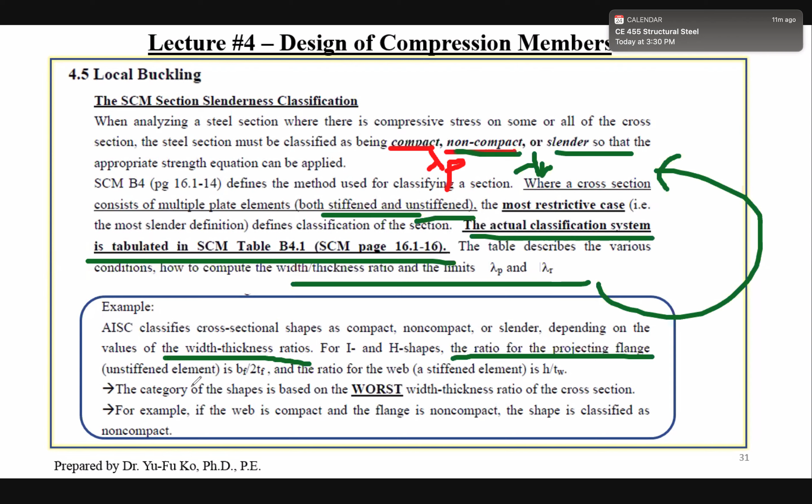So for I or H shape, the ratio of the projecting flange elements, which is unstiffened element, is BF divided by 2TF. BF is the width of the flange, TF is the thickness of the flange. And the ratio for the web element, which is stiffened element, is the height of the web divided by the thickness of the web.

So the category of the shape is based on the worst unstiffened and stiffened element in this shape to define the cross sections. The worst width over thickness ratio to define the cross section is compact, non-compact, or slender. So for example, the web is compact, but the flange is non-compact. So overall the shape will be classified as non-compact. We pick the worst scenario.

Okay, so I think I should reorder like this. The worst scenario is slender, then is compact... oh yeah, then is non-compact. Best is compact. So that would be the order.

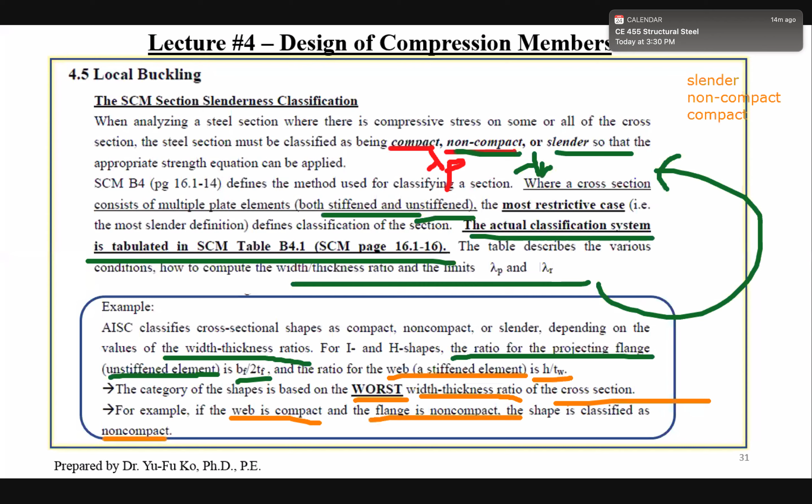Now, for local buckling, the slenderness will be based on the width over thickness ratio of the slender plate element that make up the cross sections of the most steel member. So like I mentioned, for local buckling, it's classified by compact, non-compact, and slender.

So the separation point will be lambda P and lambda R. But for column, the main thing we need to focus on is this separation point, slender or non-compact. All we care about is whether the plate elements that make up the cross sections is slender or not. We really do not care.

Whether that is compact or non-compact. So for column, again, we only care about if the plate elements that make up the section is slender or not. Okay, so that's the main concern for compression member.

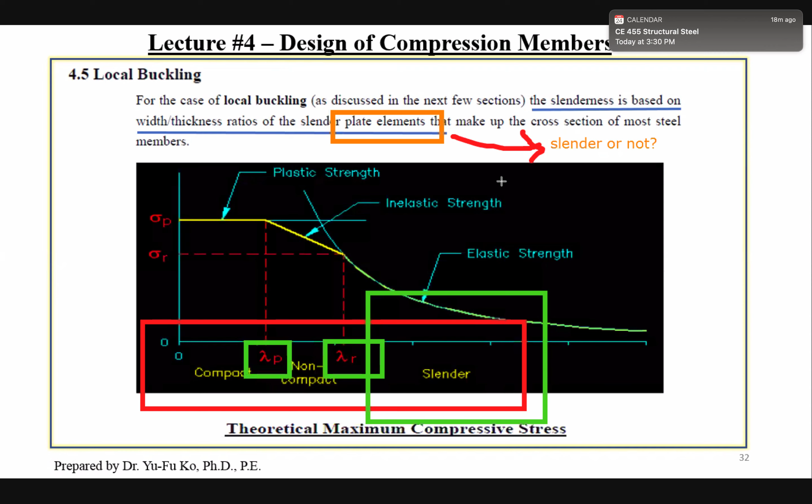All right. So first of all, we need to define what is unstiffened and what is stiffened element. So let me see, let's go to this.

This figure 7 is in your textbook as well. This shows you the stiffened and unstiffened elements of various cross-section shapes for compression member and the limits for lambda R, which is from table, construction manual table B4.

So let's look at the W shape, for example. So for W shape, this is what we call unstiffened elements, and for the web, we call this stiffened element. So how to differentiate this as stiffened or unstiffened?

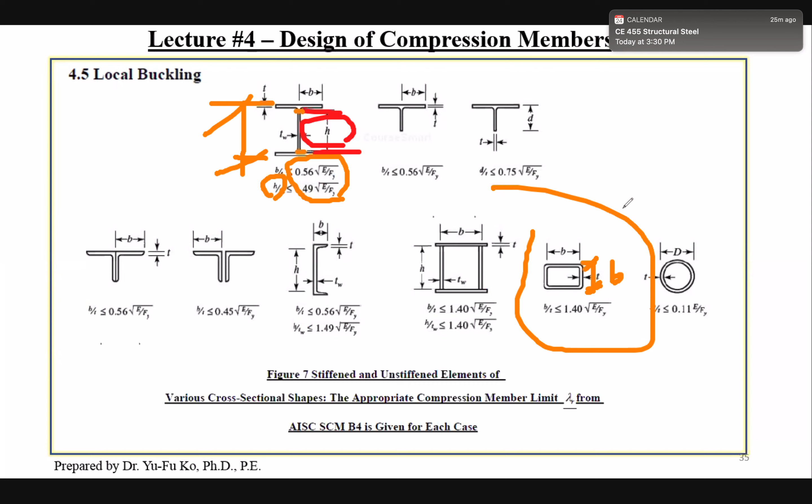We'll go over one example about this so you have a better idea about how to apply this equation to classify the cross section. We'll go over one example. Any questions? No, sir.

All right, so let's continue where we left off. The first 8 cases listed in the manual, table B4.1, refer to unstiffened elements. The remainder cases refer to stiffened elements. The table includes figures to illustrate the definition of different components.

What the table does not include is a graphical representation of the stress distribution that applies to each case. The applicable stress state is included in the element descriptions. Note that the cases for unstiffened elements do not include the effects of combined compression and bending. The equation conservatively assumes uniform compression due to either flexural or compression elements.

For the stiffened element cases, the combination of flexural and compression is considered separately from the cases of pure compression and pure bending for W-shape or I-shape members. So this only affects the limit for lambda P, not for lambda R.

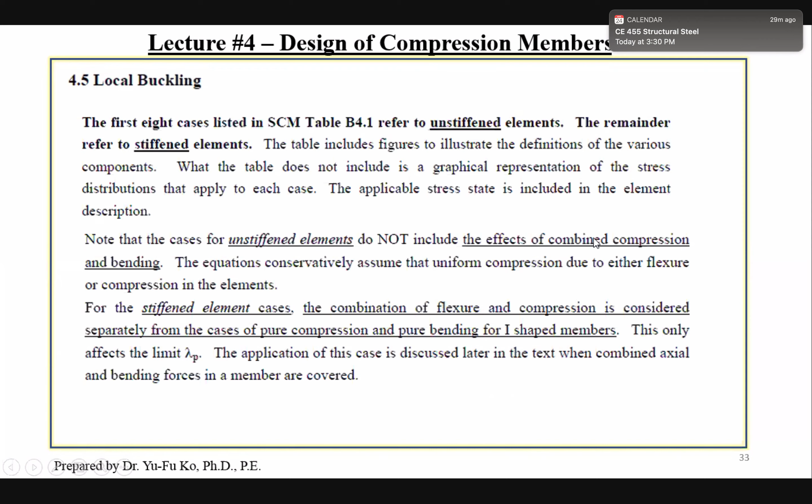But anyway, this is only for your information. You don't need to pay too much attention or worry about these notes, just for your information. What you really need to know is where to find the table in the manual to find the limits for lambda r for stiffened and unstiffened elements.

So for I or W and H shapes, the projecting flange, like I just mentioned to you, is considered an unstiffened element, and it can be taken as BF over 2 divided by TF, which is BF over 2TF. BF and TF are the width and thickness of the flange. The upper limit for lambda r, slender elements, is 0.56 square root of E over Fy, like I just mentioned to you in the previous slides.

As for the web, for W and H shapes, it will be a stiffened element, and the width is the distance between the roots of the flange. So it's classified as H over TW. So like I said, H is the distance between the roots of the flange. TW is the thickness of the web. The upper limit for slender elements, lambda r, is 1.49 square root of E over Fy.

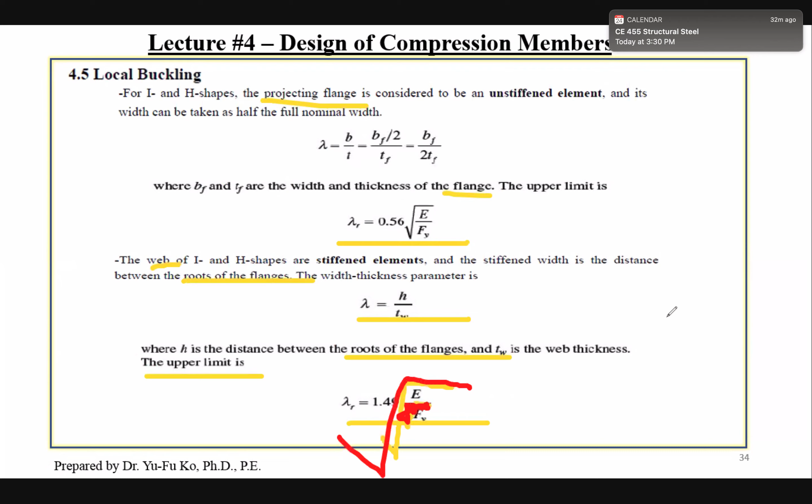So this is what we just talked about for W or H or I shape. This is the graphical representation about local buckling. As you can see, there's a wrinkle happening. This is what we call local buckling on the flange. So the slenderness of the elements - compact, non-compact, slender - will be shown like this representation.

And one more note for your information. If you go to Part 1 of the manual, for example, I just threw out a section - W16 by 31, for example - you will see a footnote C right next to the notation W16 by 31 in the manual Part 1. And if you read the footnote, they will tell you that these sections...

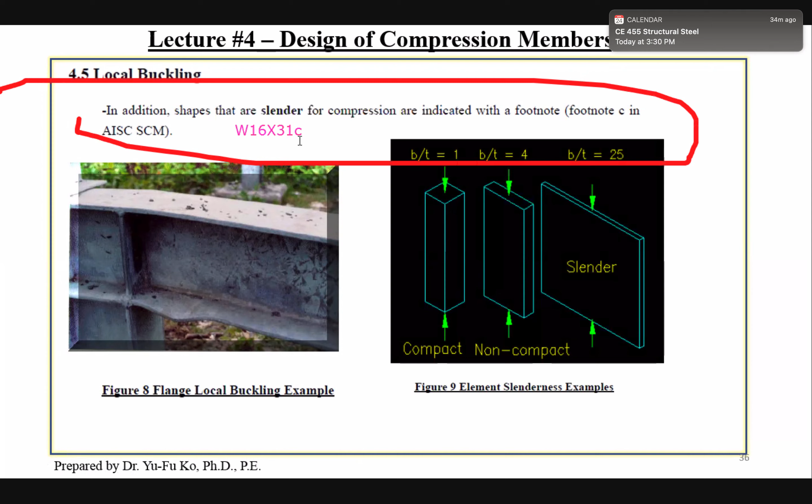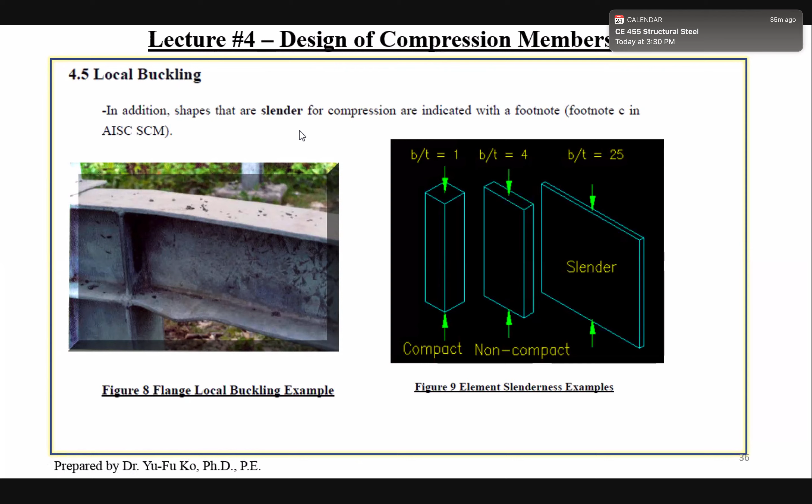Let me see, this section - this section is slender for compression. So if you see a footnote C next to the designation of the shape, which means this shape is a slender cross section for compression. So if you guys have the manual with you, you can go ahead and check. Go to Part 1 of the manual. If you see a footnote C next to the shape designation, you will see the description: this section is slender for compression. So which means the manual already checked and classified the slenderness of the shape for you.

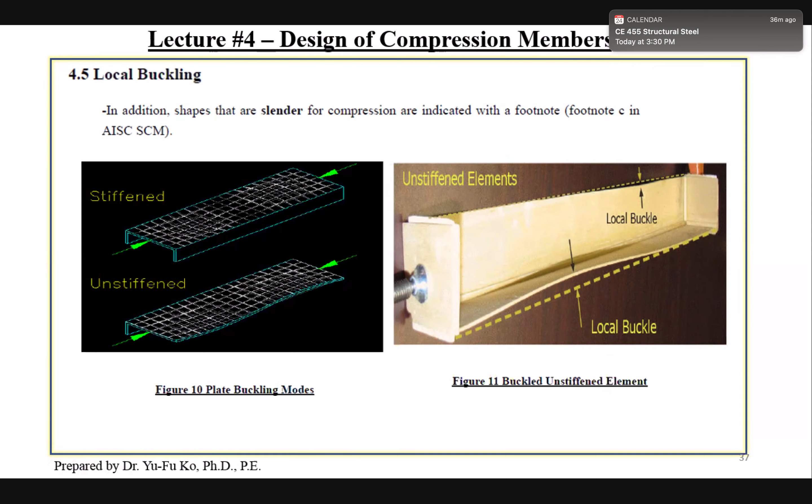Now, those are more graphical representations about the local buckling for stiffened and unstiffened elements in reality. So like I said, buckling stability alone is a one-course subject in graduate school in the future. If you guys are interested in this theoretical analysis, you can take the course Stability and Buckling in graduate school in the future. But this is all where it comes from, all of this local buckling. So now, like I said, on stiffened and unstiffened elements, where I highlighted here - this is for unstiffened, and this is for stiffened. So these are exactly the same as you see in your textbook. I just drew it with different colors for you to differentiate. This is unstiffened, this is stiffened elements.

So let's show one example. Example 4.2. I think example 4.2 we covered last week - W14 by 74 column. That's what we did the calculation for the global buckling strength last week, I think it's on Monday. But now, example 4.3, let's examine and investigate if this column has local stability issue, local buckling.

So what we can do is go to Part 1 of the manual, then you can read the flange width 10.1, the flange thickness is 0.785 inches. So for the width and thickness ratio for the unstiffened elements, which is this guy, in the W sections, is 6.43. The lambda limit for unstiffened elements is 0.56 square root of E over Fy, which is 13.5. This number is bigger than 6.43, so this is okay. So meaning the unstiffened elements is non-slender.

Likewise, let's check for the web. This one, stiffened elements. The ratio is H over TW, and is equal to D minus 2 KDES. So what does it mean? What it means is the W sections - if you zoom in, the W sections actually have a kink or transition between the web and the flange. So you see these transitions. So this distance in Part 1 of the manual we call KDES. So there are two, on top and bottom. So your H is actually D minus 2 KDES. It's the design value of K, based on manufacturer. So in the manual, they give you the smallest value as a design value.

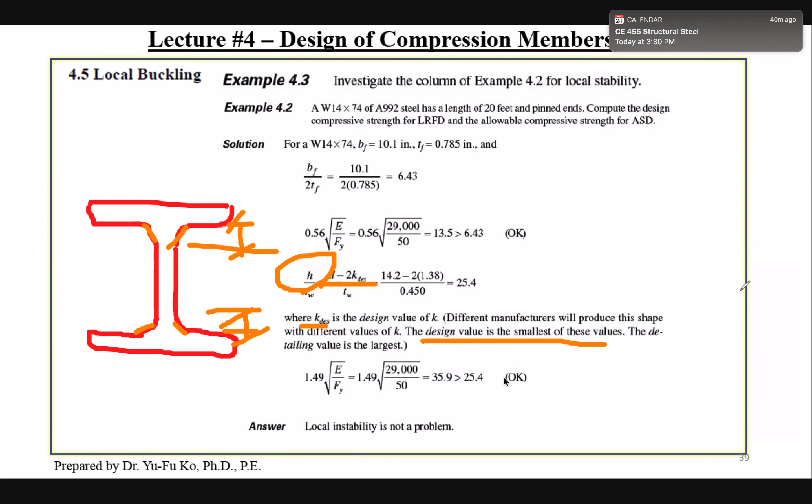So your H is D minus 2K, this number is coming from the manual as well on part 1. If you go to W14 by 74.

So with that ratio, you got 25.4. The lambda R for the web is 35.9. It's bigger than 25.4.

So this means your flange is non-slender, and this means your web is non-slender. So because both of these are non-slender, the conclusion is your cross section of W14 by 74 is non-slender sections. So local buckling is not a problem.

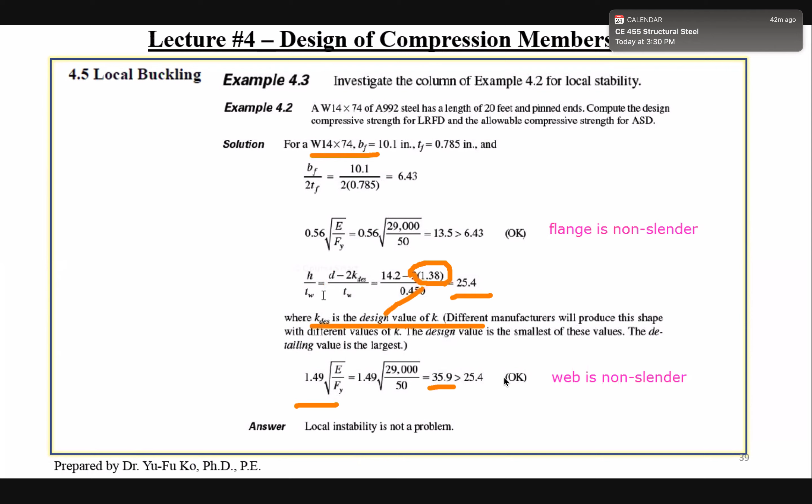For the first equation for the web, what is D again, Professor? Which one, for the web? H over TW, and what is D? This is the ratio of this guy, H over TW, the thickness of the web, is a width over thickness ratio.

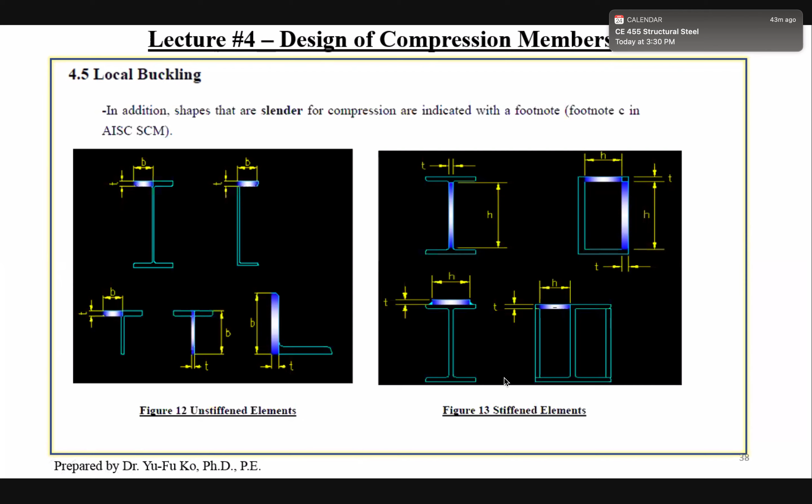Where did you get the 14.2? This one, the D from manual. Thank you, sir.

So if our answer was less than, would that be local buckling is a problem? Less? Yeah, because we got our numbers to be - or sorry, if it was the other way around, would we get buckling? Yes, it will be slender.

Okay, it wouldn't be like compact or anything? It'd just be slender, it's not compact. When you're bigger than lambda r, it's slender. Then you have a local buckling issue.

Okay, is there ever a case where it's equal to? What's that? Is there ever a case where it's equal to? Equal? Yeah, it could be. If that's equal, it's also non-slender.

So the equation here is less than or equal. So if you are less than or equal, they are fine. But if you are bigger, than it's slender. Gotcha, thank you.

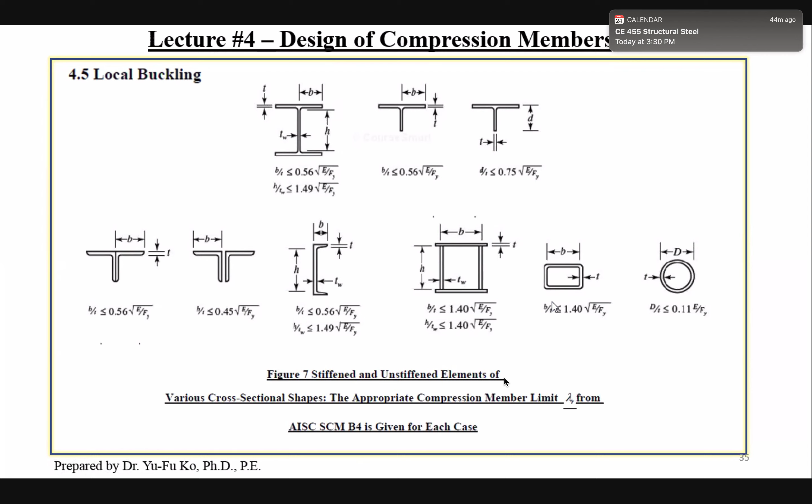Good questions. Any questions, discussions? No, sir. Okay.

So again, all this value is coming from part 1 of the manual. You just plug into this to calculate H over TW. Likewise, bf over 2tf, all this value is coming from part 1 of the manual as well.

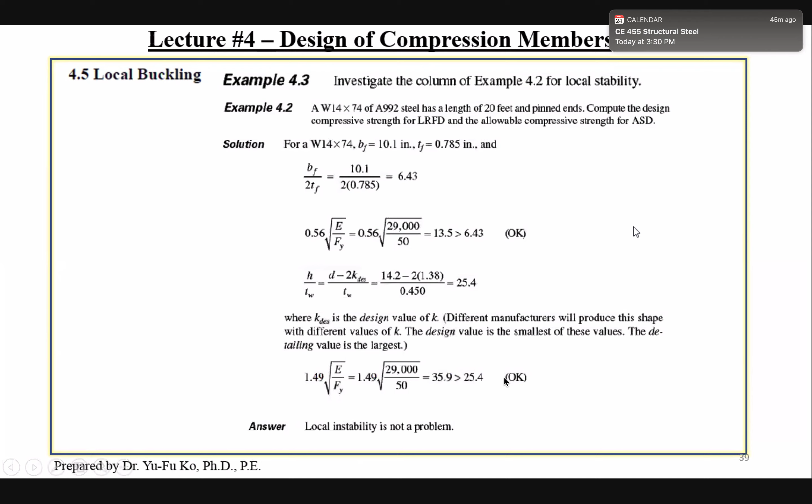So if your lambda is bigger than lambda r, then to account for the local buckling effect, we need to use the reduction factor we call Q. So what you really need to do is similar to the global buckling equation you learned in class, you just need to consider Q in these terms, to account for the local buckling effect.

And here, I would like to make a note. Our lecture is based on 13th edition of the manual, so we use the Q factor. If you are using 15th edition and beyond, they are not using the Q factor. They are using C1 and C2 coefficients and factors to account for the buckling effect. So that one is quite complicated.

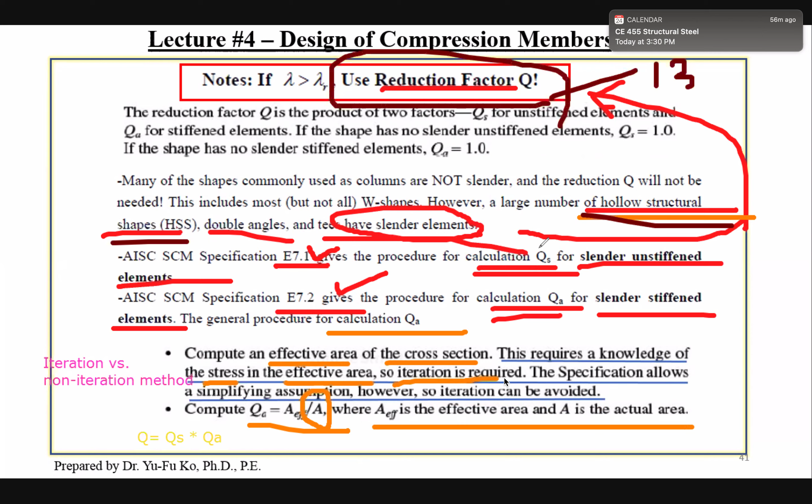Okay, so once again, this is based on the 13th edition of your manual. All right, any questions? Any questions or discussions?

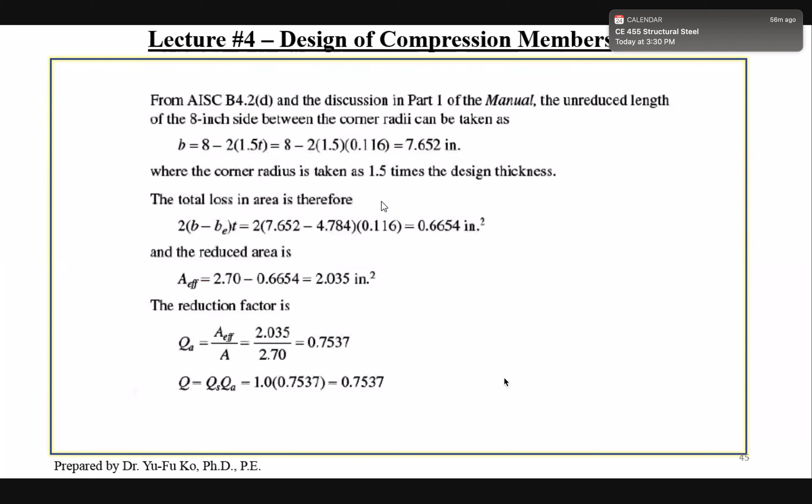So after we come back from spring break, we'll talk about example 4.4, where we'll discuss, for example, HSS cross sections for a column. Then we need to consider both global buckling and check if local buckling applies. If we have a local buckling issue, we need to calculate the Q factor - let me give you a heads up. We need to calculate the Q factor to account for that local buckling and to calculate the strength for that. So this is an example I'm going to go over after we come back from spring break. This just gives you a heads up.

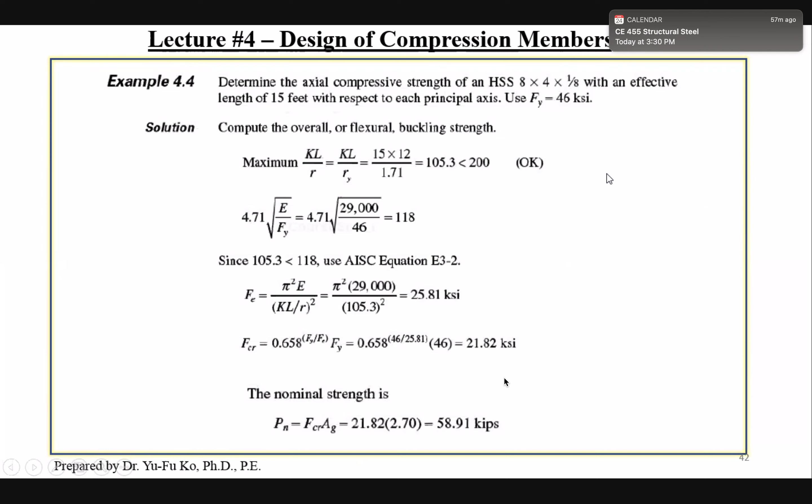Like I said, for most of the W sections, those sections are not slender cross sections, so usually you do not have to account for the local buckling reduction factor Q for that.